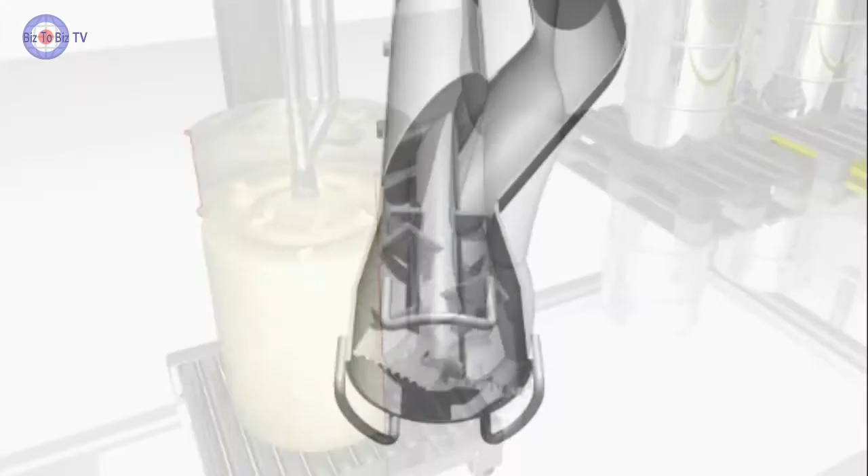What sort of products do you supply at the moment, Ewart? The key process that we supply is the powder transfer system. That was really the cornerstone of the business that Yves and Frederick started.

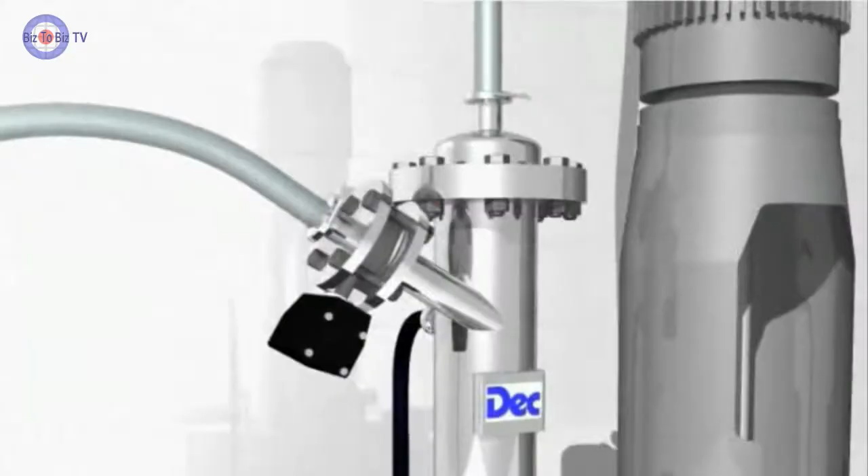It's now known in the industry as the PTS. It does what it says, it transfers powder. The benefit of the system is that it transfers powder very, very safely and uses what's called dense phase processing. That means you cannot generate an explosion - that's the biggest benefit. It's really designed to transfer any powder from things like big bag stations, into vessels, into anything that essentially needs moving from one process to another.

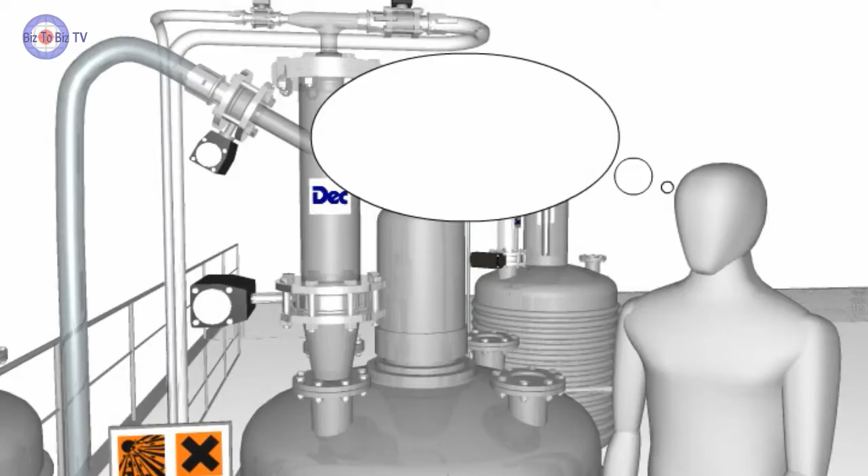We also get involved in powder filling processes. That would include things like the drum containment system, for containing drums with toxic products and moving them from one station to another.

We get involved in powder emptying systems where we use our feeders, powder feeding systems. They would include things like the powder flex, transbatch, and the PTS feeder. That would give a much more accurate feed into any particular process.

Within that group, we are bit by bit developing our own microdosing products. There will be a new range of microdosing equipment coming out.

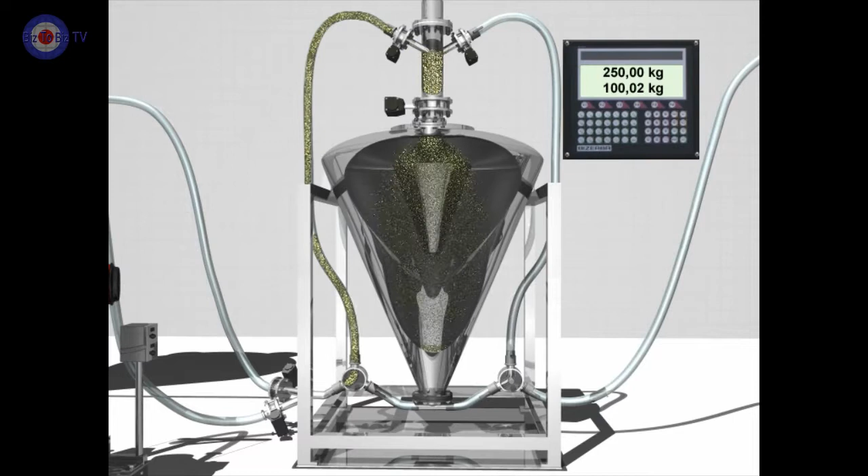Following on from the PTS systems, we have a quite game-changing system called the batch mixer. It has huge benefits - it's very much a new technology within blending of powders. We can do very small turnover products, so we can put less than 0.1% of product into a bulk and get a very good distributive mix.

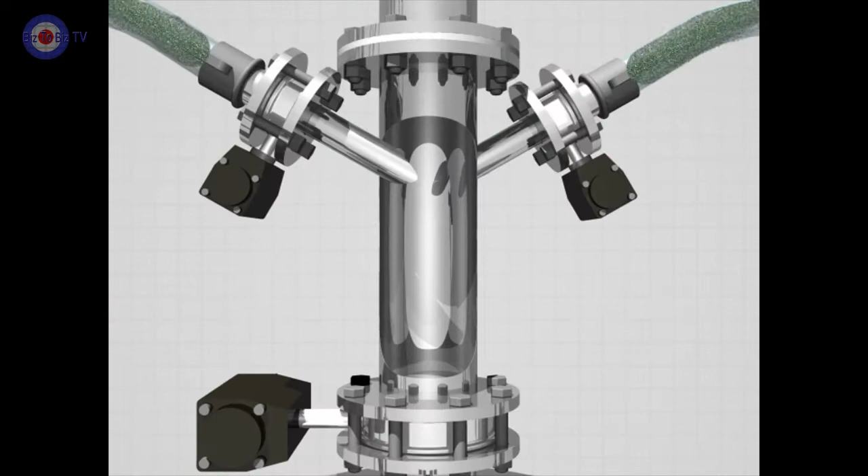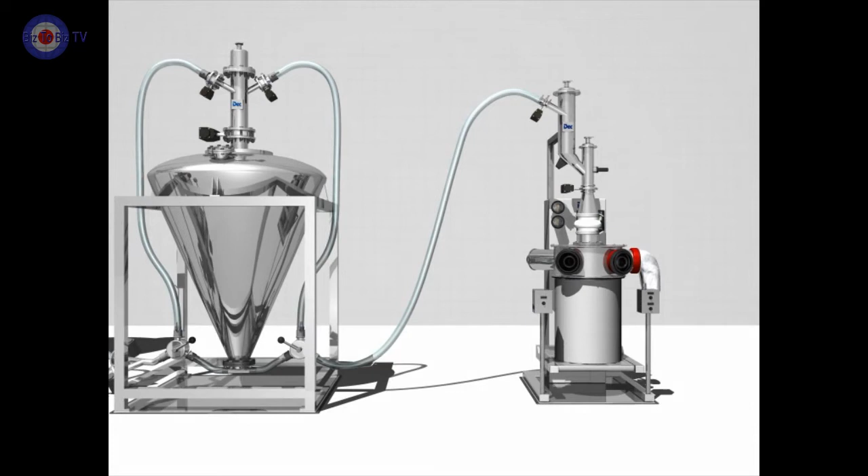It was developed by both DEC and one of the leading institutes in Switzerland, so it's been validated on chemical and pharmaceutical processes. The added benefit is it can be made sterile and can handle both sterile and toxic products, which is quite unique. It doesn't need tumbling, unlike old technologies where the powder gets tumbled. Maybe we'll talk about this in a later program.

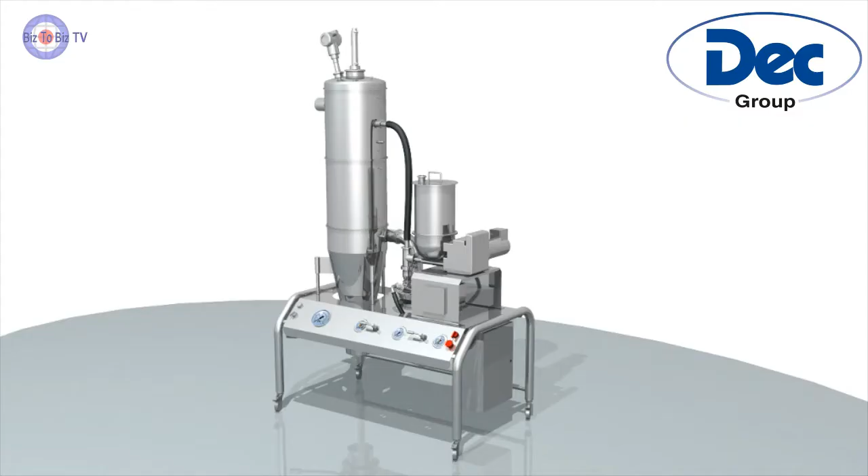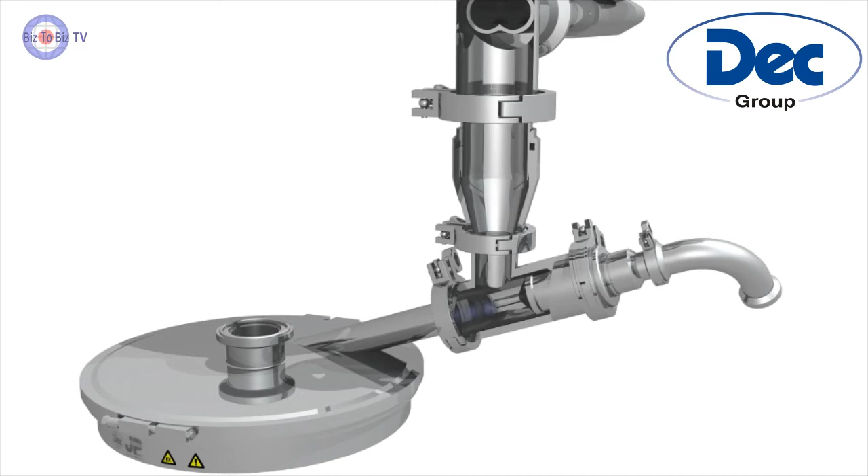We also in the group have micronizing processes, where we really work in less than 5 microns because we're looking at high quality processes, though we do some lower quality processes around the cosmetic industry where we're looking at maybe a slightly larger particle size.

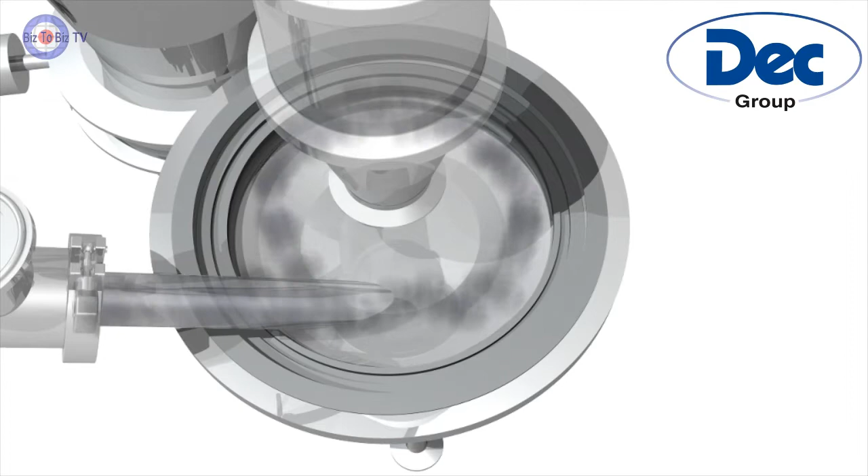We have machines that go down to R&D development, which would be the MC1, up to clinical trials scale systems, maybe the MC50, and then following on to full scale processes, which include up to the MC300s and 400 machines, processing up to 100 kilograms an hour, maybe more depending on the product.

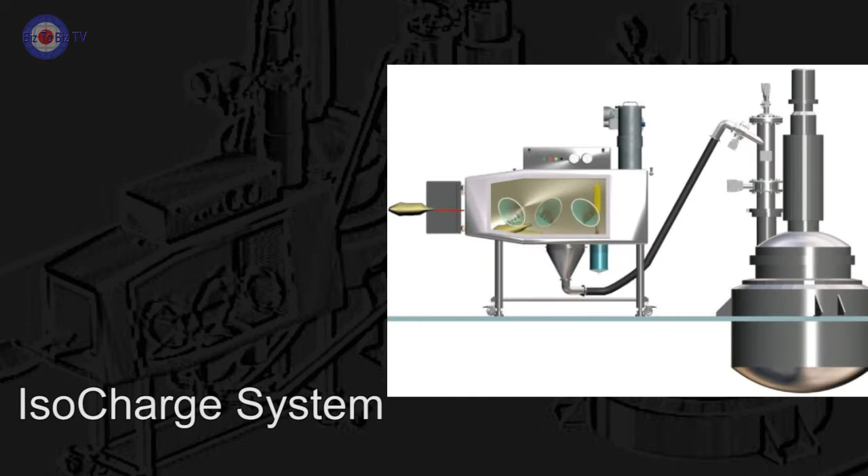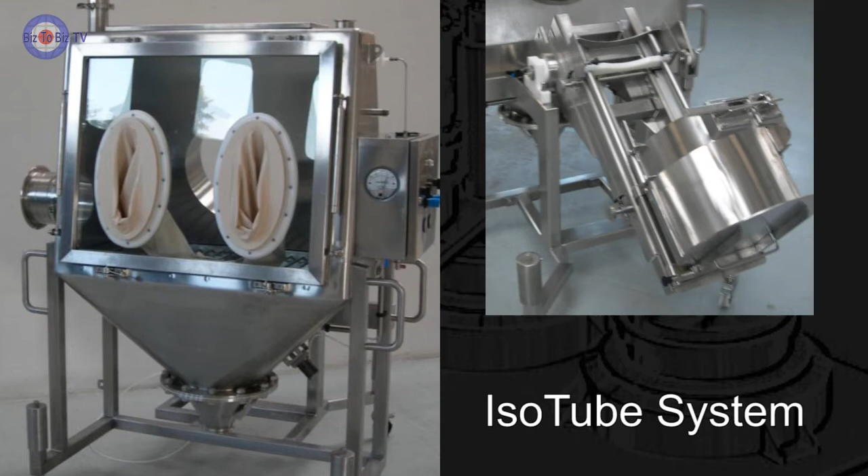And what sort of products are you supplying right now? Within the group now we also do containment systems, ranging from the standard type system, which would be the IsoCharge for charging bags of powder into vessels - toxic powder that is - through to the IsoTube, another small standard system for handling drums, right through to the ISO dryer, which is used to unload product from filter dryers. It's quite a specialist piece of equipment, but nonetheless very important in that area of the industry.

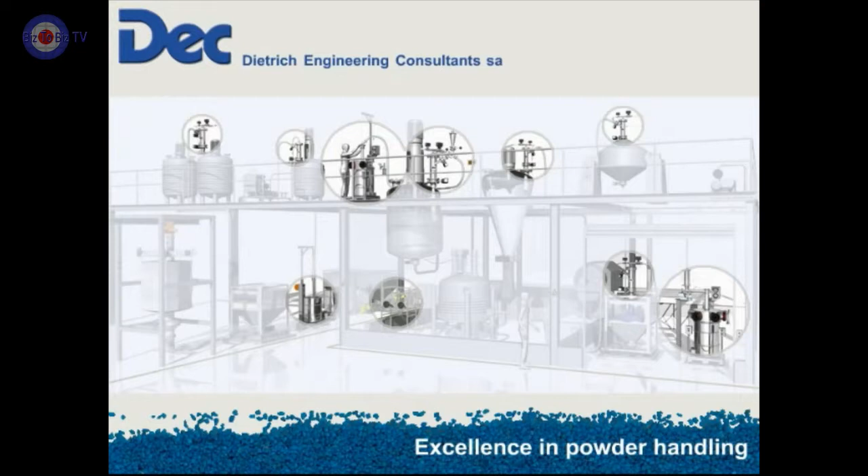Following on from that, I wouldn't call it a range, but we have the ability to manage much larger projects - these can be several million euros, where we're talking about major multi-stage processes which can be contained, or maybe not contained, depending on the process. These can include anything from multiple dispensing systems through to multiple processing systems.